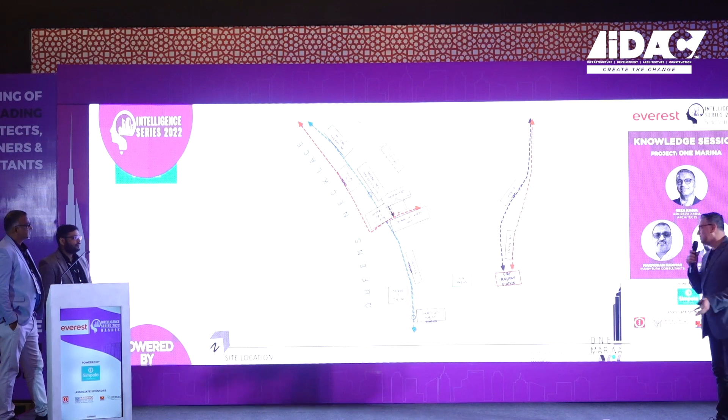Okay, so that's One Marina, and it's on a very prime location we call the Queen's Necklace. Of course, the Queen is no more, but we still have the necklace, and we are doing the jewel in the necklace of the Queen. It's on Marine Drive, just off the sea coast. This tower would not have been possible without the CRZ lifting. So this is a byproduct of the CRZ relaxation.

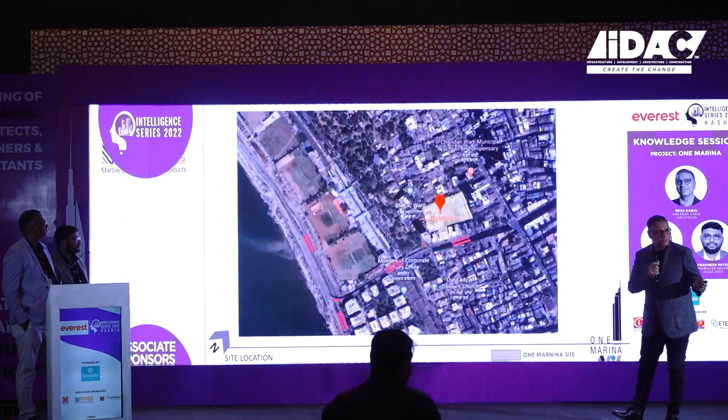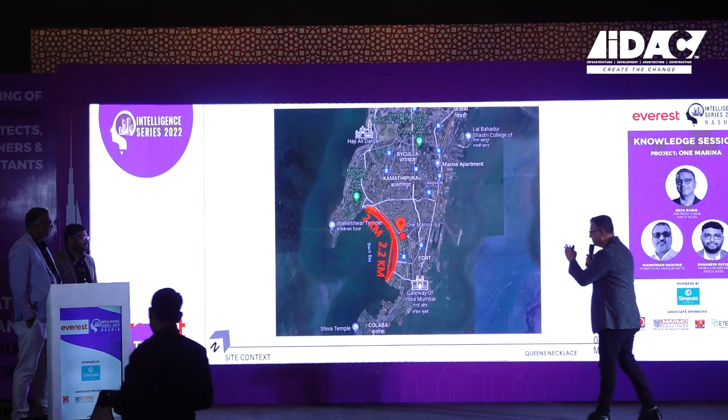That's Mumbai, and that's where our tower is. It's in the bay. This is how the site was; of course, it's changed quite a bit. The site is just off the coast, and nothing is obstructing the views. You have almost 2.2 kilometers on the left-hand side, and on the right-hand side as well, about 2 kilometers of unobstructed view.

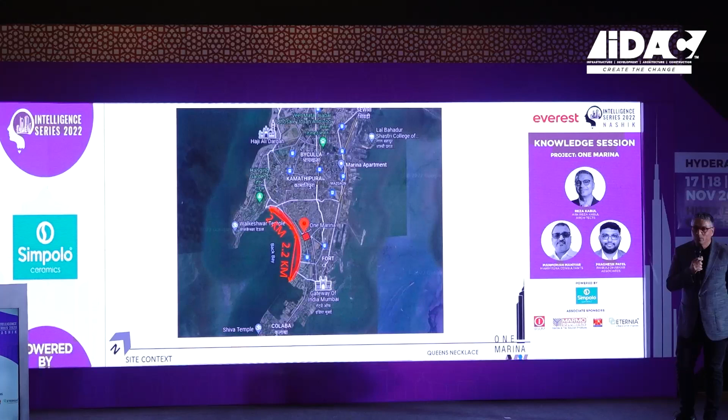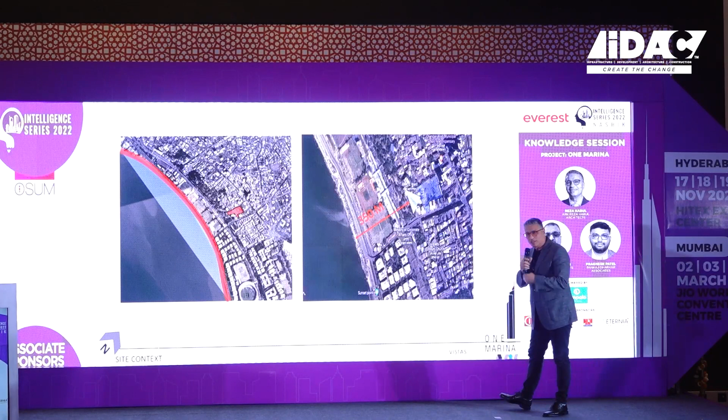The biggest challenge: when we started the project, the client said, I want all my flats to face the sea, so all the flats should have a view. It was a big challenge because the plot is not very wide. It's a lakh square feet, and it's 350 meters away from the main sea. Out here we've got the gymkhanas, the police gymkhana, the Hindu gymkhana, the Islam gymkhana, and nothing is going to come up in front.

It stands at 250 meters tall. We've got nothing in front. That's the Arabian Sea. The only thing coming out there is the coastal road, which is landing over there. So it's very strategically located.

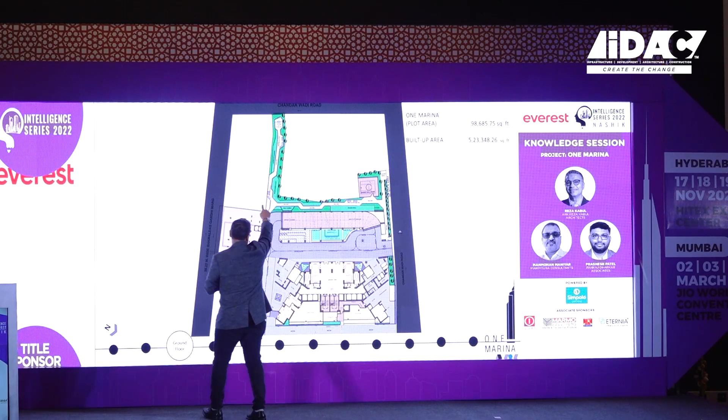So as I said, that's the layout of the plan, the tower. That's the plot, and that's my main access to the site, and we have another very narrow access from there. This is an existing building, and we are doing a redevelopment. So this is the sale component, and behind it we've got another tower which is the rehab component.

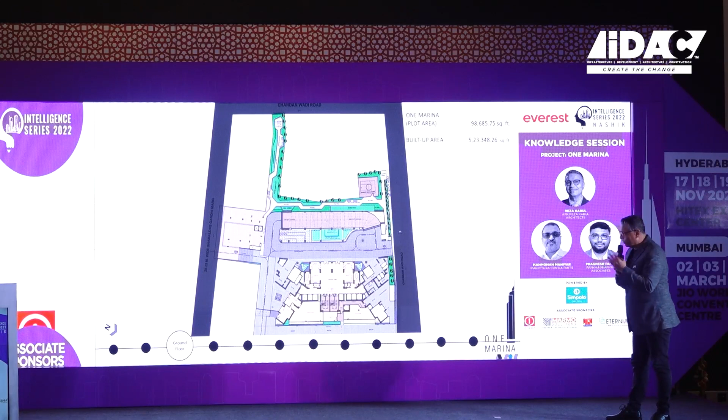Firstly, we wanted the views in the front, with the sea in the front, and at the back we have a 100-meter tower for the rehab. So we didn't want any of the apartments facing the rehab component, and we wanted to get the best of views. That's my ground floor, where you have the entrance lobby. You come in, and it's a 7.2-meter entrance lobby.

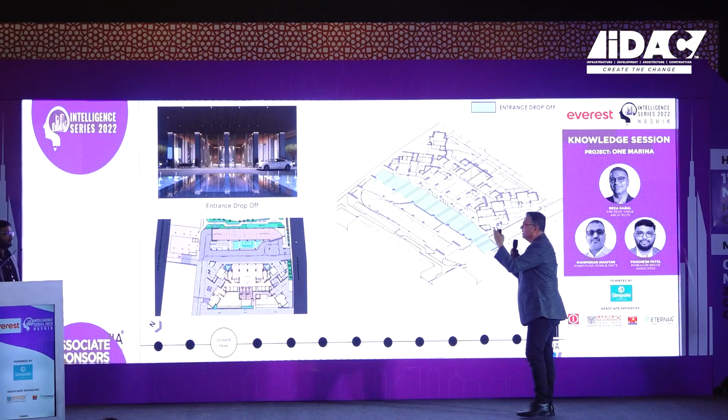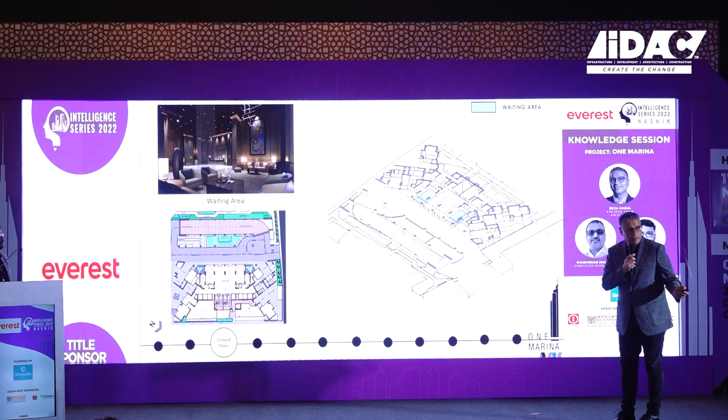Once you get into the entrance lobby, that's the look and feel of it. That's the waiting area; it's a very high-end residential building. That's the lift lobby area. And at the drop-off, we've got a very nice water feature, a musical water fountain, and the lobby. That's the drop-off area again.

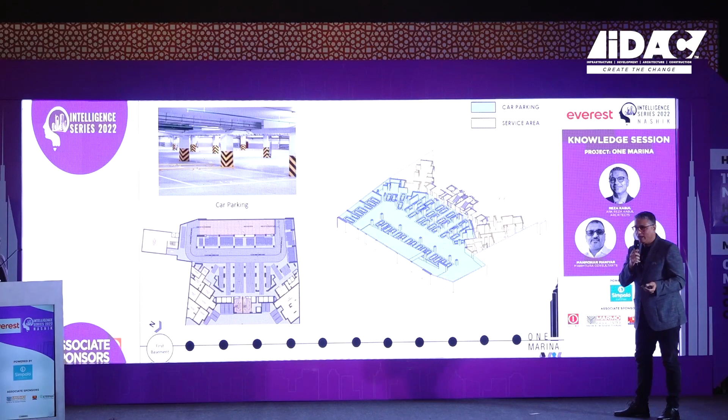And then we have got 2 parking levels. Here, the major challenge that we had was the soil condition. I think the structural team would be telling you a bit more about that. So we had total sandy soil over there. And once we went deeper, of course, we had to fit in the parking. So we went in for 2 basements and 8 levels of podium parking.

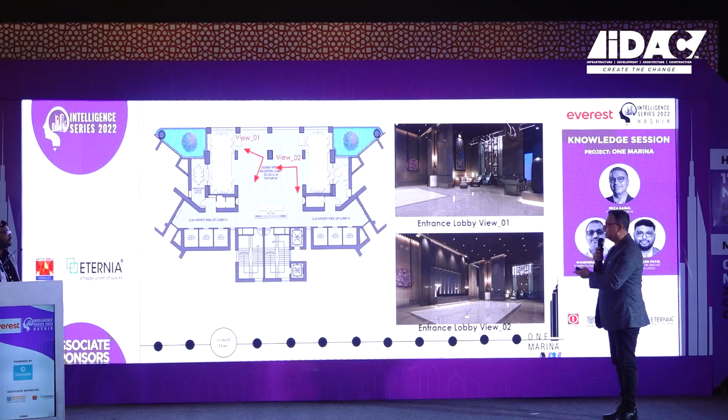That's, again, a detail of the lobby. So we have 8 elevators, all from 5 meters to 6 meters a second. We did a traffic analysis looking at the number of apartments that we have.

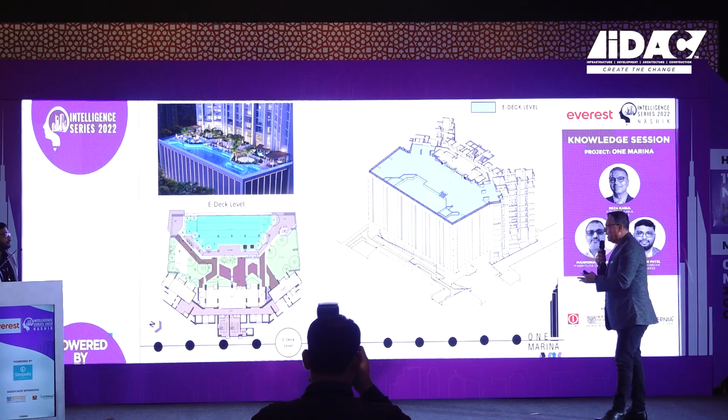That's our podium parking and the E-deck. So once you come on the E-deck, you have total unobstructed view from here. You can get the sea view, and we have the pool. We have got a double level clubhouse, which is there. It's a very elaborate and a very extensive clubhouse that we are having, and a major pool area.

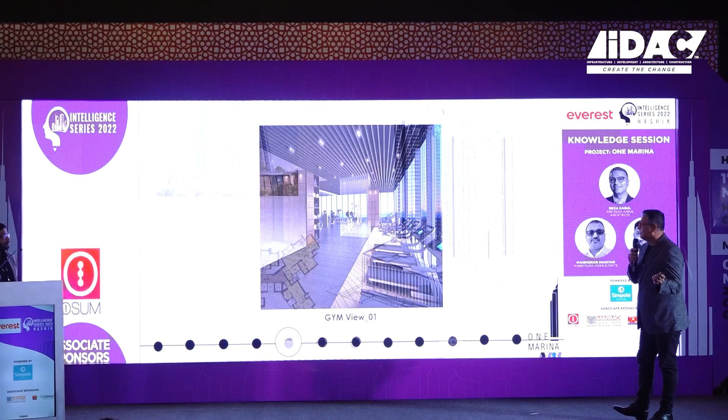That's some of the views of the E-deck, and that's again a closer look at the E-deck. We have the gym out there. So we have the gym looking at the pool and overlooking the sea.

So it's a very challenging design because we have all the apartments facing the sea. Because of the views that you saw, from this side as well as from this side, we took all the apartments facing the sea, and we got a back which is totally dead.

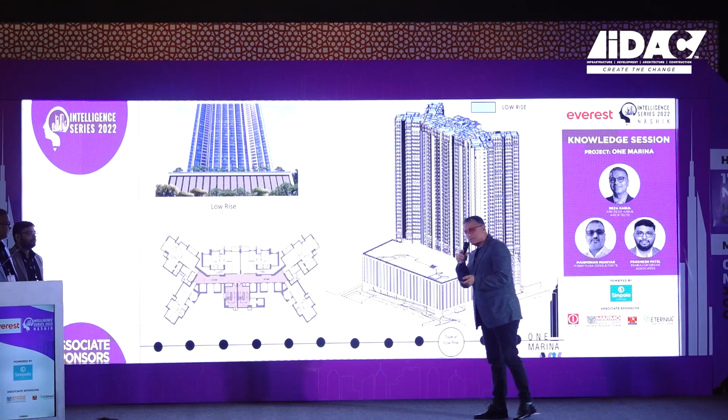Now, he would explain more, because we had certain issues. When you do a tower like this, a high-rise tower especially, with the core getting detached from the tower, it's a little challenge, but my structural team overcame it after we did the wind tunnel testing and everything.

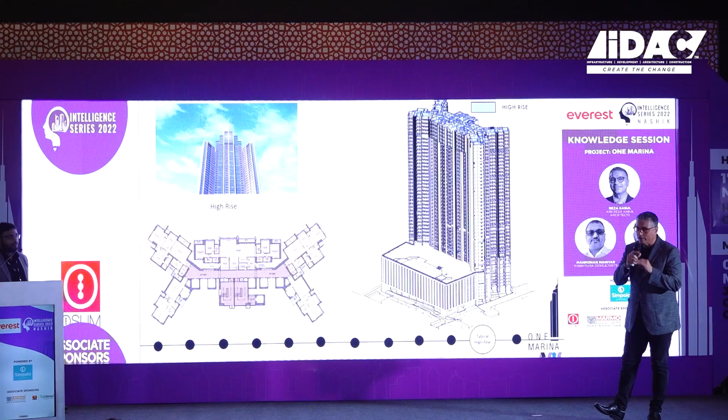So we've got several options for the apartments. We've got 2s, 3s, 4s, 5s, and as we go higher, there's a high-rise part which comes in. Now, looking at the facade, we haven't gone in for a total glazed facade. Every level has its individual facade. So we've broken it up so that the cost is controlled. And you guys can tell me more about it. But we did a lot of this.

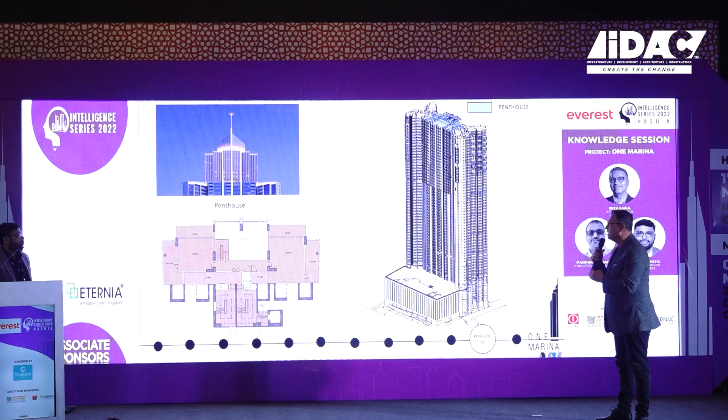And then we have 2 levels of amenities. One is on the 8th floor, and one is on the 69th floor, right? So we have 68th floor. So that's again another amenity level. And then you have the sky villas. There are about 4 sky villas. Each are going to be used by the developers themselves.

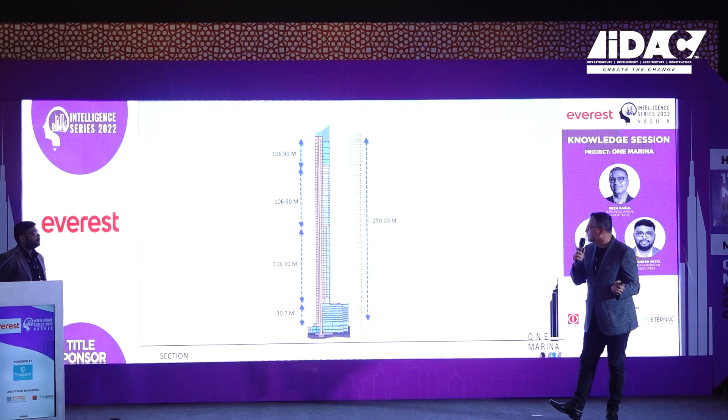So then we started work, and of course, we did a raft foundation, and so that's the work progress. Now we are up almost to the ground floor. We had 2 basements. We had a raft of about 2 meters plus because of the upliftment, being close to the sea. I'll ask Manmohan to carry on, please.

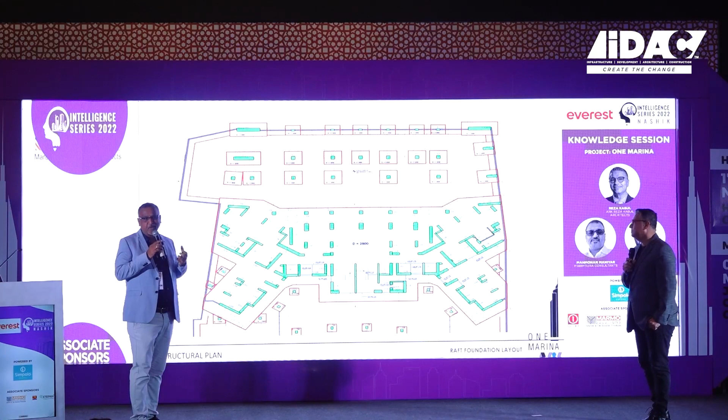So any such high-rise is a big challenge to bring into reality, because basically 2 things we want: strength and stiffness. And all that strength and stiffness, we have to get it satisfying all other requirements. So you can see this is the structural plan at raft foundation level. This is the raft foundation. A complete raft is given here for the tower area, and separate isolated footings are given for the non-tower area.

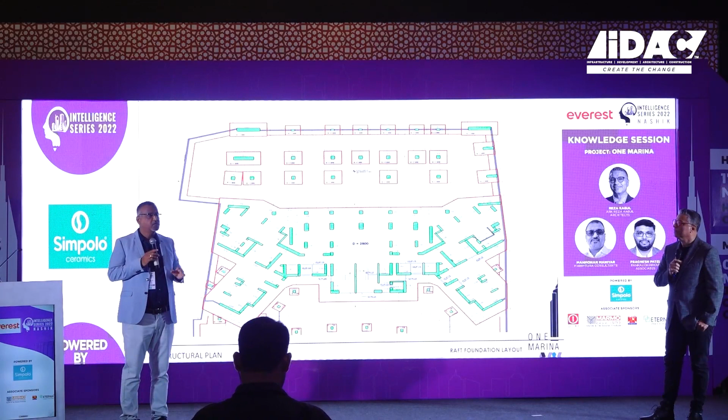The depth of the raft is 2.8 meters. And the upper strata was totally sandy soil. It was just flowable soil. So the decision of basements was taken, and luckily at 8-meter level there was a very nice strata which was giving us 200 tons per square meter of bearing capacity. So these are the basic layouts.

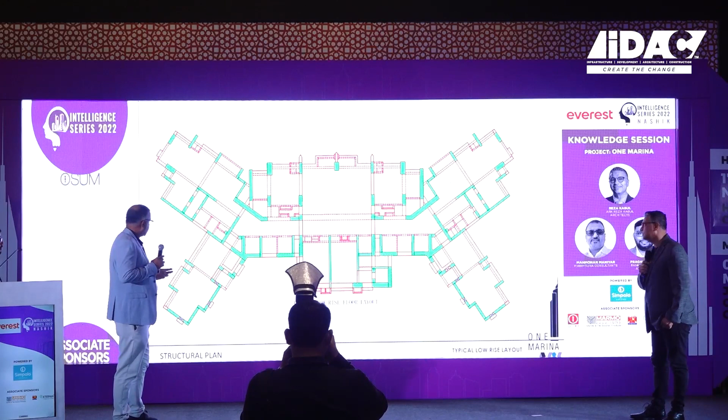Now this tower is a 250-meter high tower. A 250-meter high tower has its number of demands, and we have to get a certain strong core. Then all these lifts and all that we utilize for our strength and stiffness demand. But out of the challenge of this shape, the structure's dynamic behavior was not as desired. It was a big challenge for us. The structure's first mode was going in torsion, which is undesirable, not acceptable.

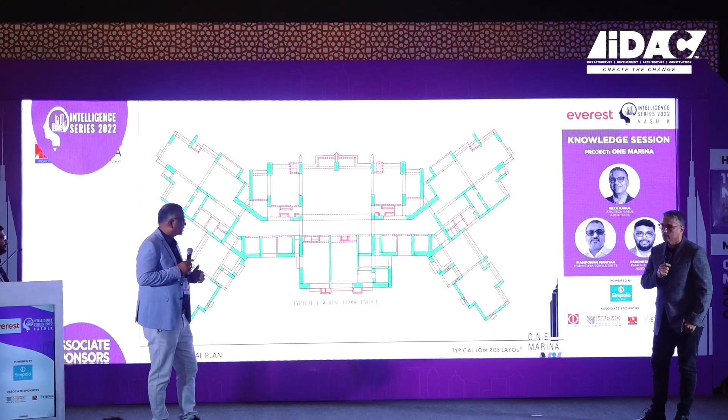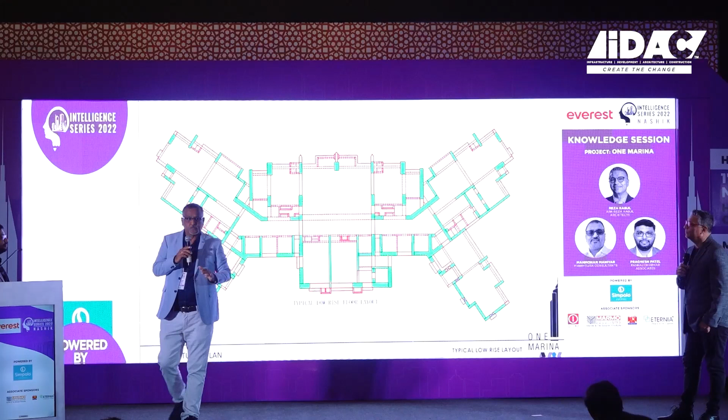So of course we have done a lot of permutations and combinations, and we utilize all these perimeter walls. And the architectural intent was also like that, to hide this side. We utilize all these sides, and a strong core is established, and the modes are then properly set.

So we had a lot of constraints, we had back and forth with the structural team, because we didn't want certain columns, we wanted to join certain apartments, as always there are in all the projects. So we had those challenges, but we overcame that.

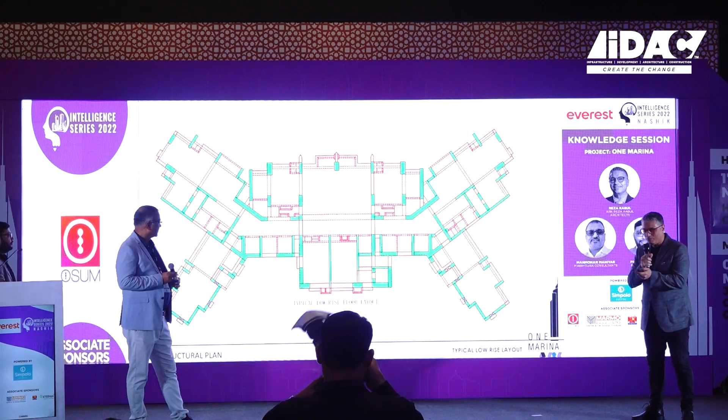Same way, high-rises are going, and very importantly in this, after doing all these permutation combinations, we were still deficient of the total permissible deformation. The structure's deformation under wind load was not under control, and then we utilized a structural system that is called an outrigger. So there are 1, 2, and 3 outriggers provided at these 3 levels, and in the next slide, I will explain how we reduce the deflection because of this.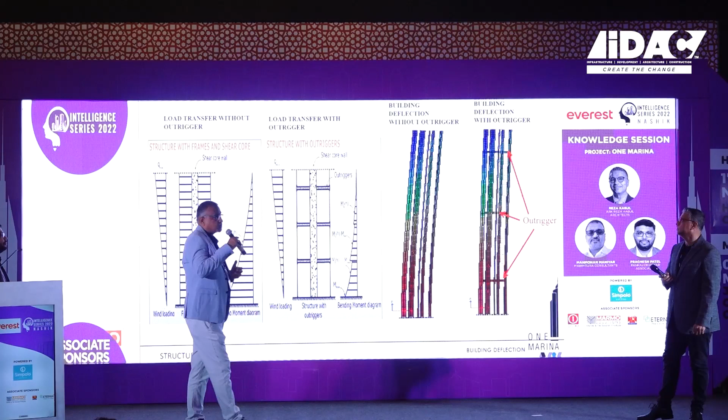And not only the deformations are important, comfort level accelerations under wind loading are also important. Whatever accelerations are developed under extreme wind conditions, they should not disturb the residents. They should be within the limit of perception, and the comfort criteria should not be disturbed. So that way it was done.

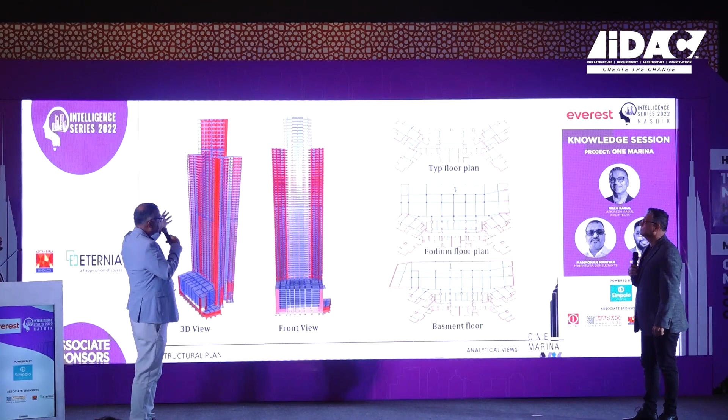These are the 3D models. Complete structural models are developed, for their dynamic behavior and static behavior. They are loaded with different loadings, gravity loads, lateral loads, that are wind loads and seismic loads, and then the forces are analyzed.

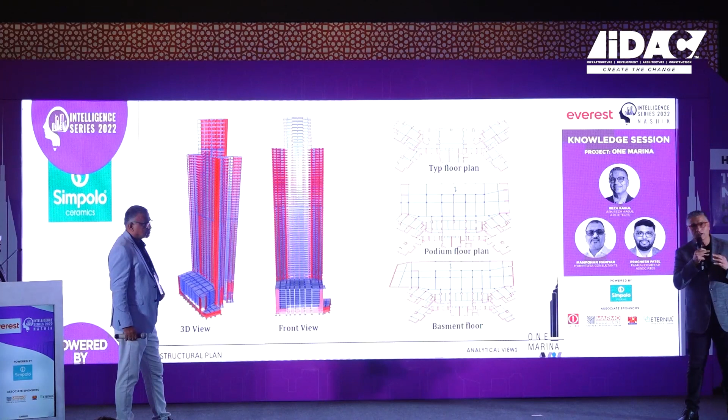So I just want to add one thing here. In normal buildings, like we used to do in earlier times, the architect used to do the building and then pass it on to the structural engineer: okay, now give me the columns. Whereas when you do a high rise, it's no more that way. You have to start working in conjunction right from day one when you start planning.

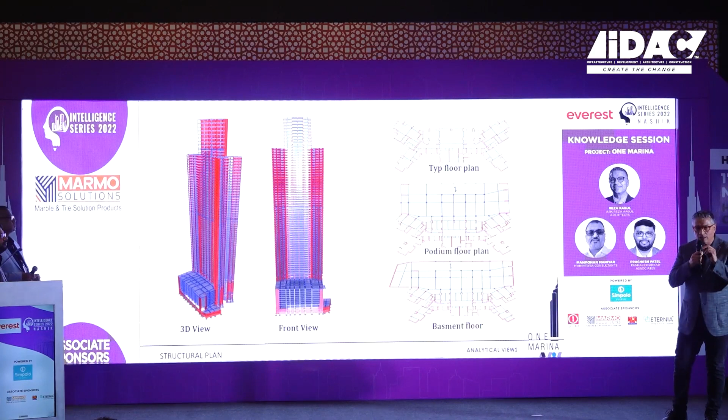So you have to involve the structural engineer, the MEP consultants, and you have to get the facade consultant in as well. We don't have the facade consultant today, otherwise he could have given a better picture of the facade. The MEP people would be able to give you a better idea. We've got service floors in between, and those service floors are used for the outriggers, as well as our services, like break water tanks and various other services. I think Pragnesh will be talking more on that.

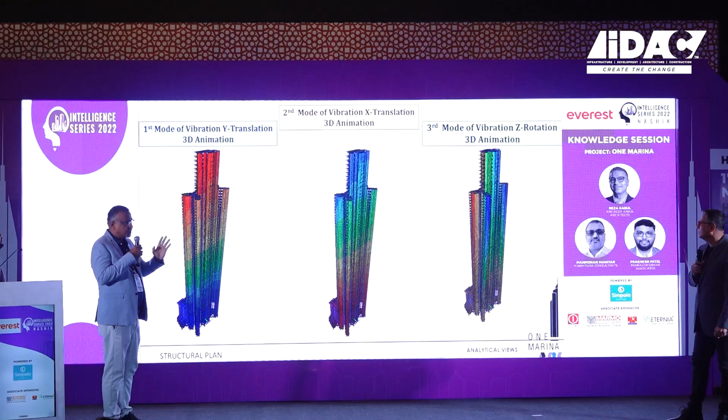So structurally, these are the modes up there. Now it is perfectly ideal the way it is required. The first two modes are translational modes, one is like this, the second is like this, and then the third is in torsion. These animations are showing you that.

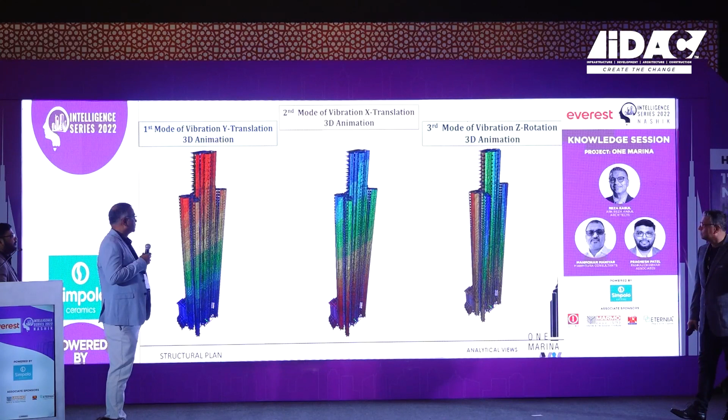Strength demands are critical. Naturally, above the foundation, the starter columns started with M70 grade. One more achievement is done here: steel grade Fe 550 is used. That is a new change that has come up worldwide. ACI 318 2019 now allows the use of the equivalent of Fe 550 in the US, and in the same way Indian IS 13920, Amendment 1 and Amendment 2, now allow you to use Fe 550.

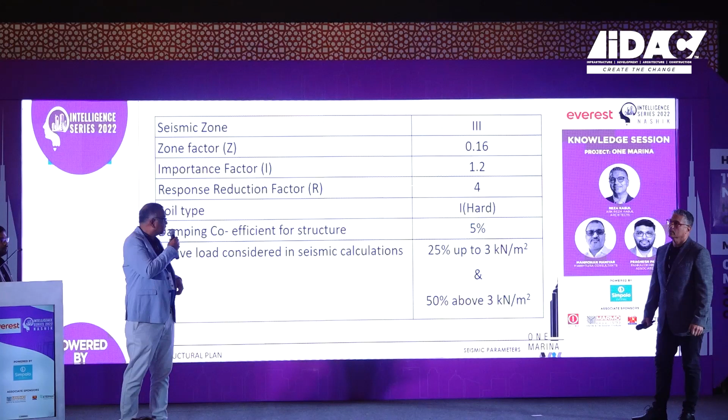Seismic forces also need to be considered for such structures. The Mumbai seismic zone is considered, Zone 3, which is moderate seismicity, and all these seismic parameters are considered. A shear wall type of system is considered here. Ductile shear walls are used for resisting lateral loads.

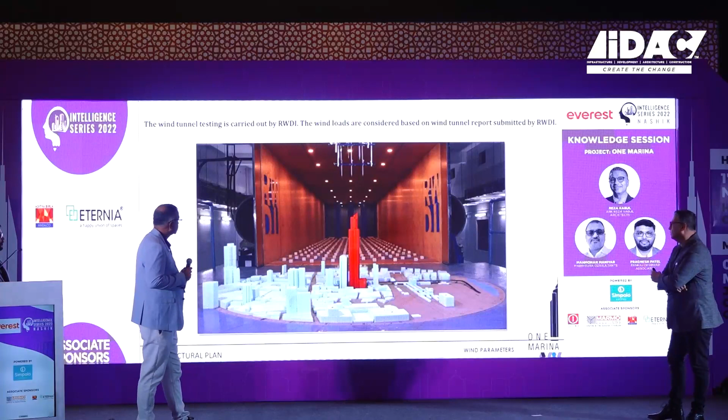Of course, as the height increases, wind forces become more critical compared to seismic. And again, the evaluation of wind forces needs to be very precise, and for such buildings, we recommend performing the wind tunnel test. So this is the wind tunnel test done by RWDI. This is the setup.

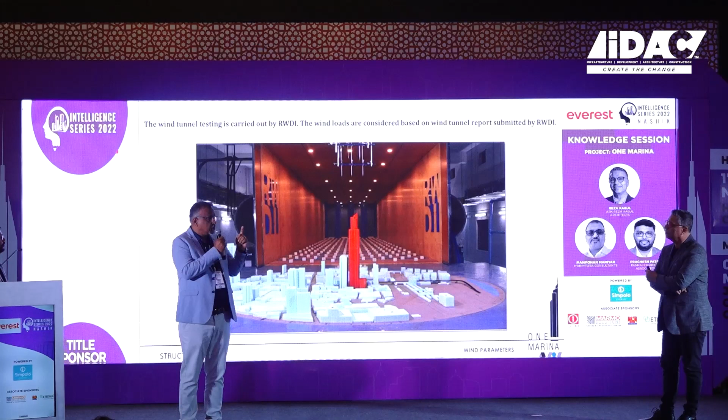Actually, wind flows at different times of year in different directions. So all loads are evaluated for 36 cases: for each 10 degrees, what load is coming for wind flowing in that particular direction. This way all 360 degrees are covered, and 36 basic wind load cases are evaluated and then applied to the structure.

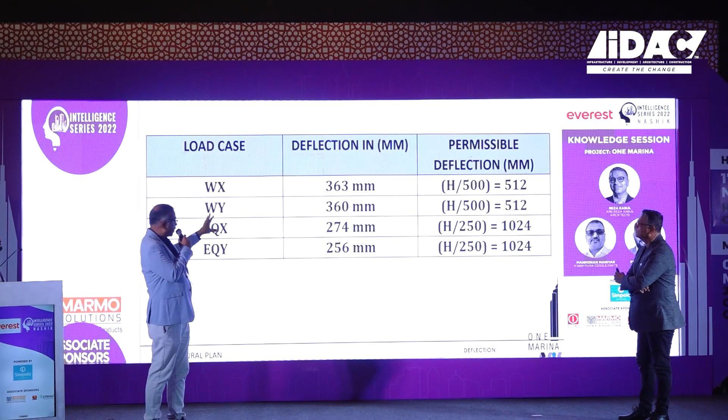So now these are the permissible deflections, H by 500, which is 512 millimeters, and with the proper outrigger arrangement, we have achieved 360 millimeters in the X direction and Y direction, which is quite a fair number.

This is about wind-induced acceleration comfort criteria. So for this residential also it is up to mark, it is not exceeding the mark. What happens under extreme winds is the structure starts oscillating and accelerations are induced in the structure. From a safety point of view they are not critical, but from a comfort point of view they are critical. So different agencies, ISO, RWDI, give

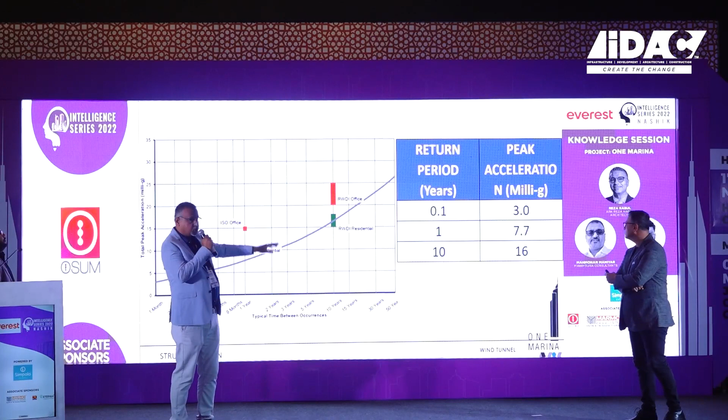this particular value of the acceptable acceleration level. And then that acceleration level is achieved here. So for a 10-year return period, the peak acceleration is 16 milli-G. So 16 milli-G is what is felt as comfortable. One doesn't feel disturbed. Yeah, so I hand over.

Designing MEPF is very critical for this super tall building of 250 meters. So these are the per day requirements of electrical, water, and fire. Just go to the next slide. In this 250 meter building, the services have been planned in such a way to keep the residual pressure within the limit of 4.2 kg at respective levels.

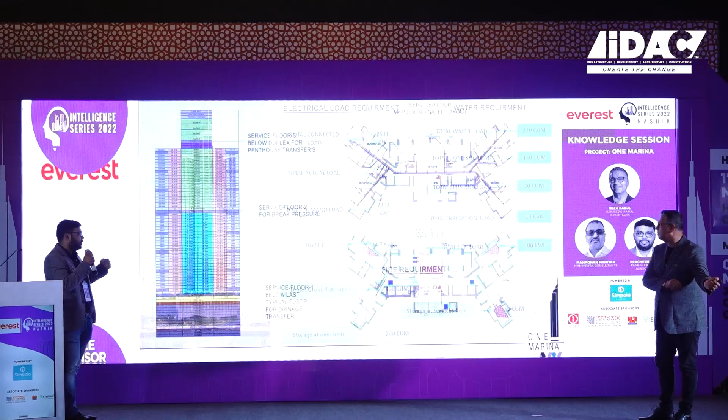Just go back. So we have planned one service floor at the bottom of the typical floor, which will take care of the entire drainage system. The middle service floor has been planned to take care of the break pressure tanks and the ventilation system of the internal toilets. The top service floor has been considered to take care of the penthouse services, which will be different from the typical core.

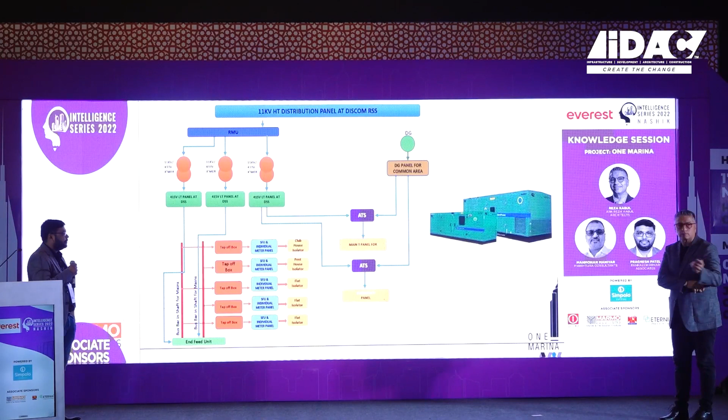Yeah, so this makes it more sustainable. You don't use that much energy to pump the water right up to the top. You're pumping it to an intermediate level and letting it flow by gravity. The same strategy we have applied for the firefighting system. We are putting three levels of firefighting tanks, which will be fed from the bottom to the mid level and from the top to the mid level.

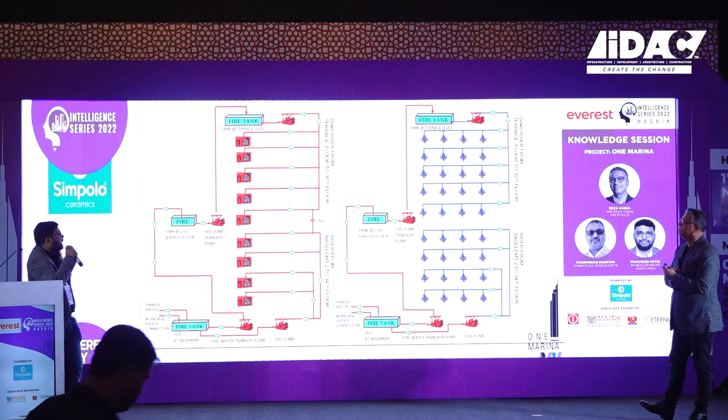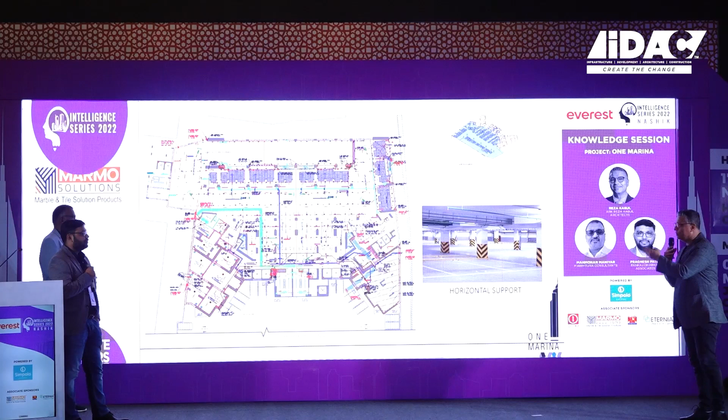So these are a few coordinated layouts. This is a basement layout where we have the STP, water tanks, and other accessory services staggered in the entire basement. We've done this building with BIM because there are a lot of services coming in and the structure, so we have to look at it first before we get into construction. Especially the service floors with the outriggers were a major problem, fitting in the water tanks, the electrical panels and all the other services. These are the podium parking levels, which have the same MEP services.

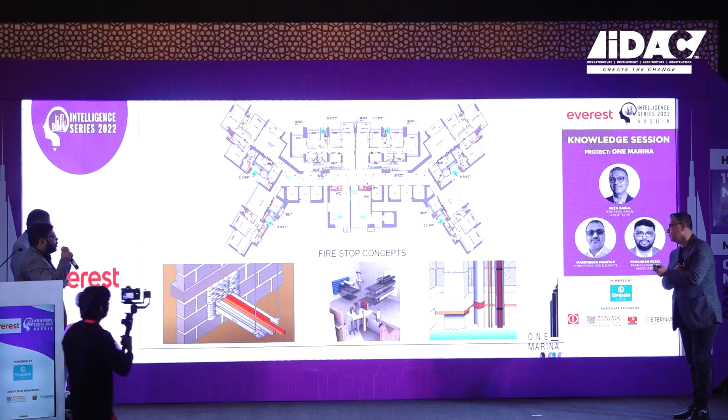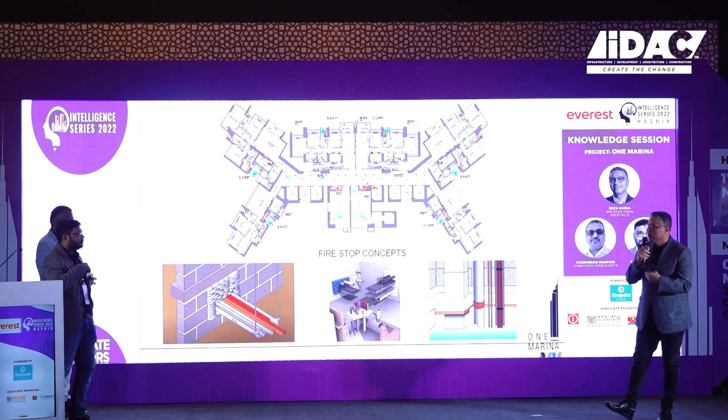This is a typical floor plan, planned in a very efficient way with service cores, where we have a bus duct shaft next to the staircase and firefighting and ELV shafts, centrally located and equally distributed to all the apartments. What we are doing here is taking meter rooms on every floor, and there's a bus duct which travels from the ground to the top. We don't have cables running all around the building, so there's no energy loss, because there's a lot of energy loss in cables.

These are the blown up drawings of the core shafts and a few of the plumbing shafts, where we are keeping ODU space to get proper ventilation.

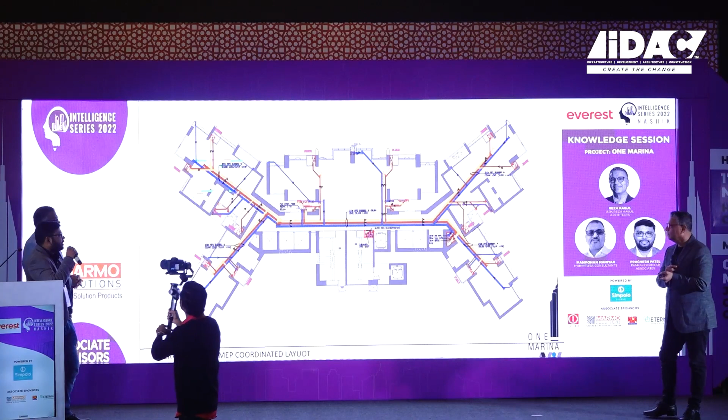So this is a service floor where we had a lot of challenges coordinating with the structural outriggers and the diversion of the drainage line. This is the heart of the building, where it required a lot of effort to coordinate with the architects and the structural. Here the water tanks are not shown, the panels are not shown, but once you see all of them together, it's a real mess and a maze. And, you know, working them all together is a nightmare.

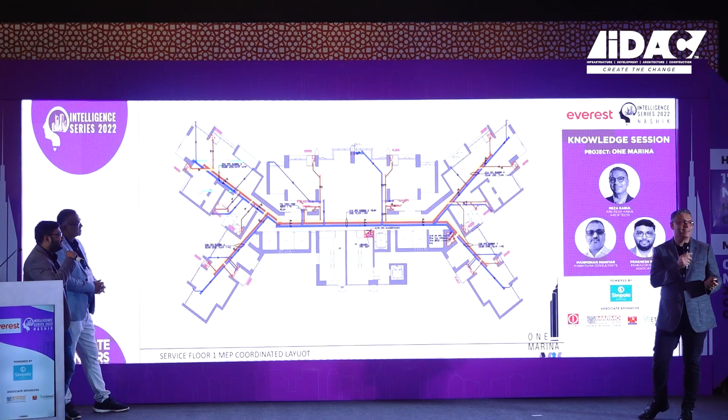So this is a middle level of service floor where we have water tanks and a water supply loop for the bottom part of the tower. These are the various views. When you go into the boat and look at it from the sea, the bay, Mumbai Bay, you can see the Princess Street Bridge and the tower in the backdrop.

So as I said, we have these as individual windows. And we have a lot of sit-out areas, because after COVID, everybody started demanding. We didn't have the balconies initially. Everybody said, we want balconies, because if you're locked up in the house, you need some fresh air and you want to get out.

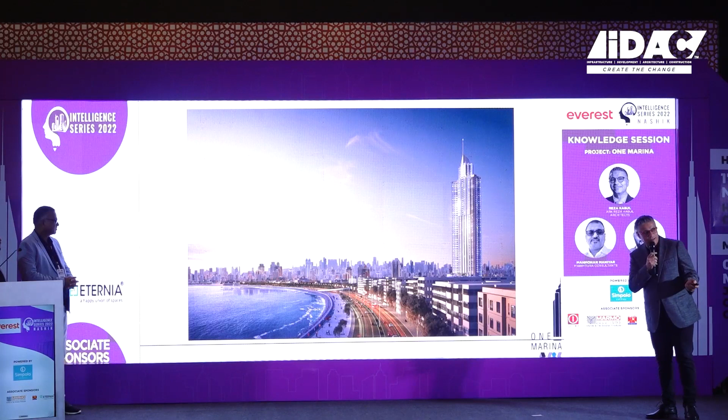That's how it fits on the Queen's necklace, the gem. So that's one recreational level out here, and then we have another intermediate recreational level up there. And from the tower, you can see the entire necklace.

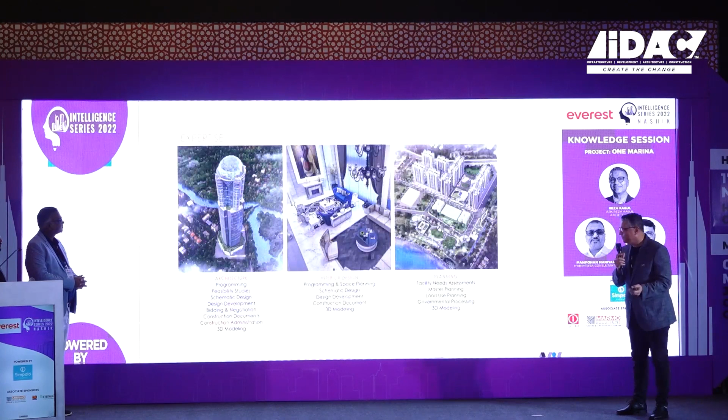As for myself, I'm Reza Kabul. I started the firm in 1988, and we have a studio in Pune and a studio in San Francisco. Over the years, we've done a lot of projects. We do architecture, interior, and master planning. So these are some of our completed projects.

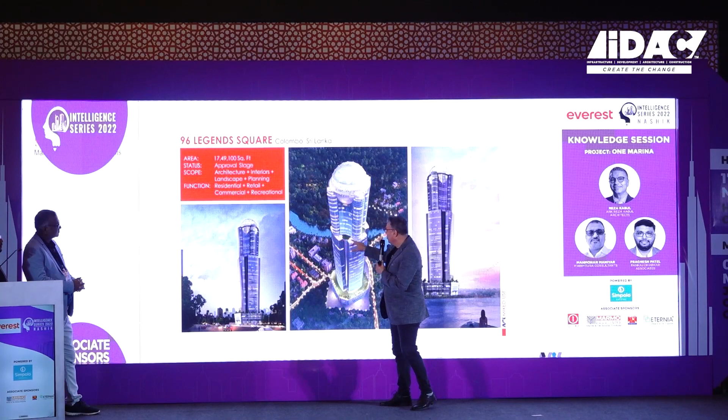When you call it a vertical city, I just put this for that. This is a vertical city we are doing in Colombo. Right now it's on the shelf because of the situation in Colombo. It has the retail component, then commercial, residential, and each has its own recreation areas. Then we have the hotel, which starts from here, and an observatory deck. Once you get into this place, you live out here, you enjoy yourself, and everything happens out here.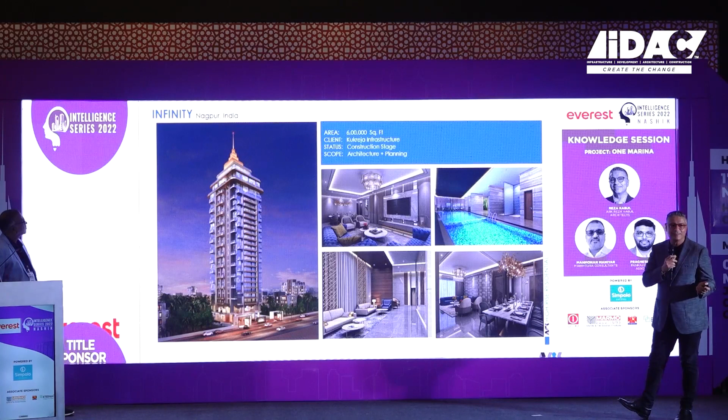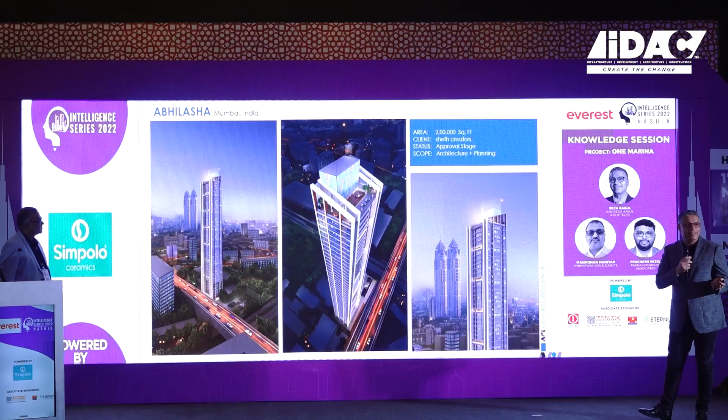That's another tower we are doing in Nagpur. All the tier 2 cities are getting it. So Nasik is also not going to be deprived of it. You're going to get it, but then we have to plan for it properly. That's another tower in Mumbai. Another one in Mumbai.

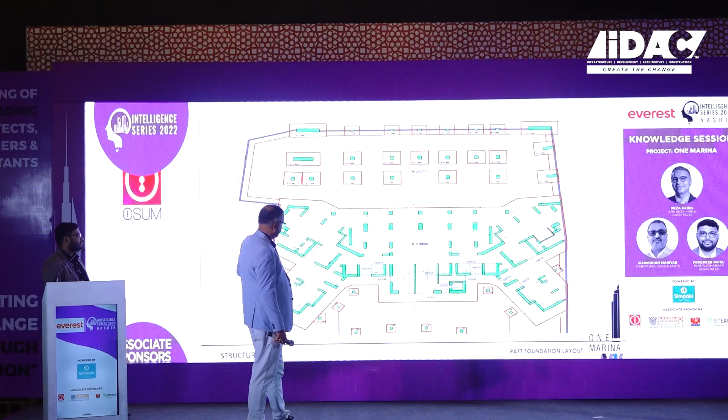This slide. So now, can you explain to me what is the aspect ratio of this building, especially at the ends? Those wings which are projecting out. How have you calculated the aspect ratio? See, now this shape has an advantage. If you look at the X direction, it's a larger dimension. In case of the Y direction, these wings are helping to some extent, if you are talking in terms of aspect ratio.

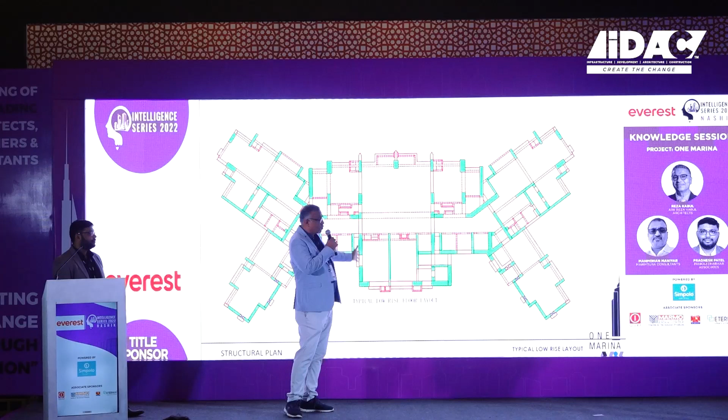But here there is a localized issue in this portion. So there is a need, and that's why this core is strengthened and stiffened with the help of outrigger arrangements. That way it is achieved. But I just want to know, in the bylaws in Mumbai, more than 1:9 they don't allow. So does it fall in that category? 1:9 aspect ratio, does it come below that?

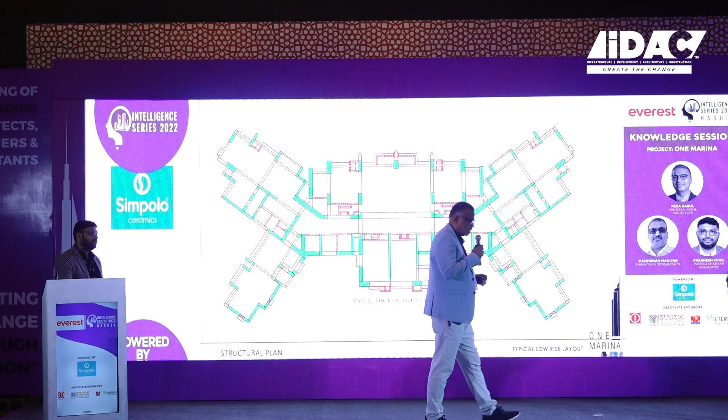Yeah, if you look at the height, the sole purpose to restrict it to 250 is our high-rise code allows buildings up to 250 meters, and the aspect ratio and the structural system. So whatever are the guidelines of IS 16700:2017, we have perfectly followed in this. And even if it crosses beyond that, there is an expert review panel provision. So you can submit your proposal to them, they review it.

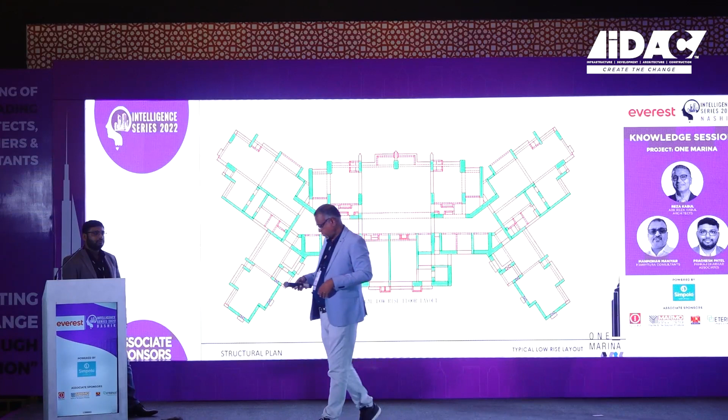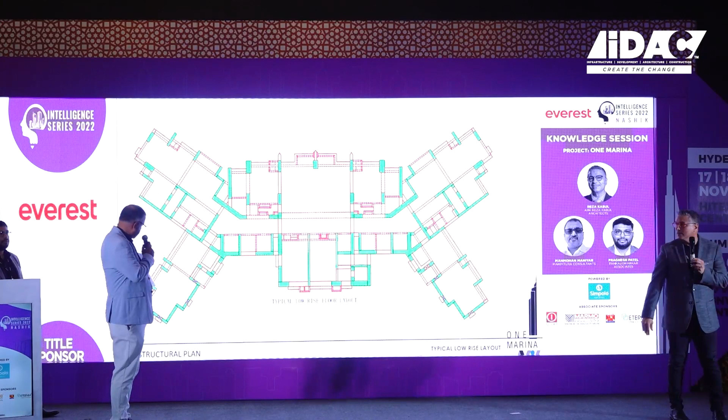Yeah, we have a peer review structural engineer on the project, and they did the entire peer review, and then we got the clearance. And here, it's his subject, but this whole thing becomes like a core, and because of the dead walls, he got the stiffness over here. So this entire thing has got stiffness because of this core and dead wall. And the beauty is this is adding to torsional stiffness also. So it helped us bring down the torsional mode to third position. Great design. Thank you so much.

So the question is to you, what are the interventions for handling the torrential rain, facing the entire Marine Drive? What architectural interventions have you as a designer considered for handling the torrential rain of Mumbai? Yeah, that is handled by the facade consultant. And the reason why we did the individual things is so that we don't have a curtain wall. We didn't want to go in for a curtain wall. We wanted to control the price.

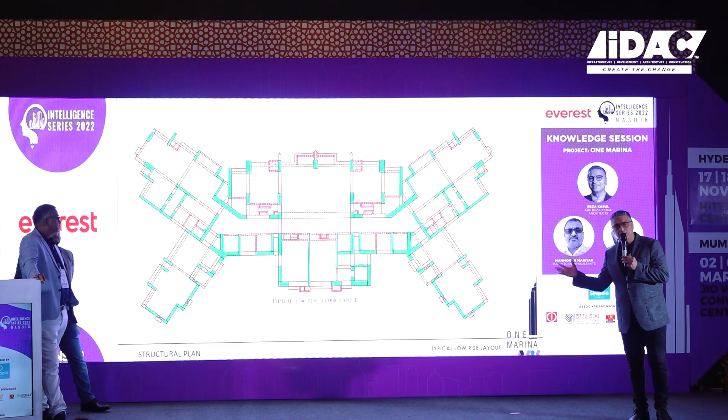And we've seen in a curtain wall, the water, once it gets into the system, it goes where nobody knows. And then how to track it becomes a challenge. So that's why we've worked out a system for individual floors, and it makes the construction also faster because it's like a unitized thing. It will just come and go into the openings, the apertures.

And in such a building, what freedom does the RCC consultant give you for the sleeves in the shear walls? What is the maximum sleeves you can carry in the shear walls for the services? It's a give and take kind of thing, and we go up and down a couple of times till we actually come to it, and we have a lot of fights on these kinds of projects. It's not easy, and that's why we bring them in at the inception stage itself. And then all these dead walls that we considered, we did it.

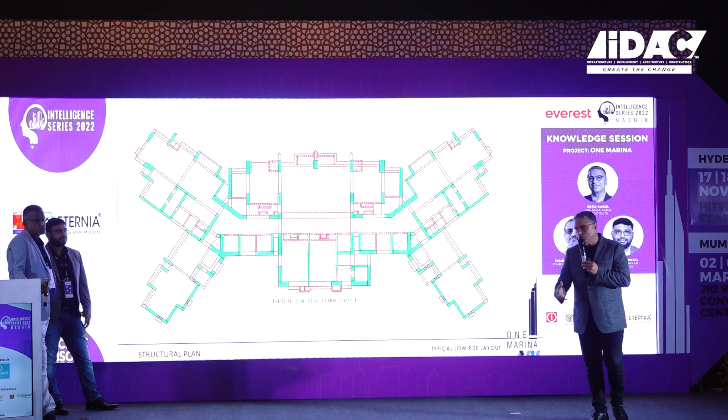Saurabh's question was a very good question. When we did the plan, we thought of it ourselves because I knew the building would go in torsion because this becomes like a separate arm. But this dead wall that you see gave it the stiffness, and that's how we could manage doing this building. And you see all the flats have got the views; the living room, the bedrooms, all of them are facing the sea. There's nothing on the back. It's only the kitchen, the toilets and the other services.

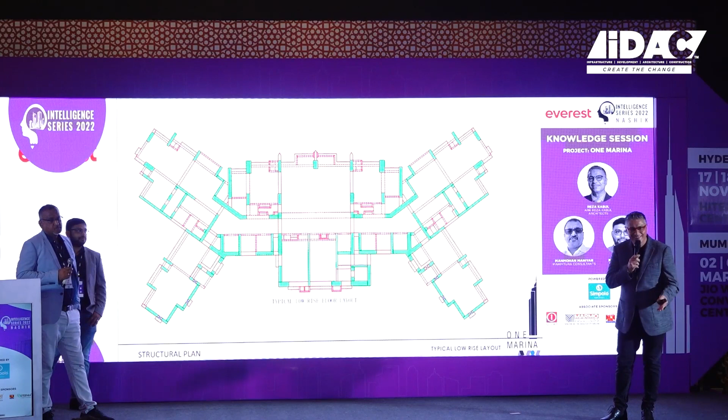Yes, any other questions? Vivek? I'll ask you once you are done with this. Okay, thank you very much. Thank you.